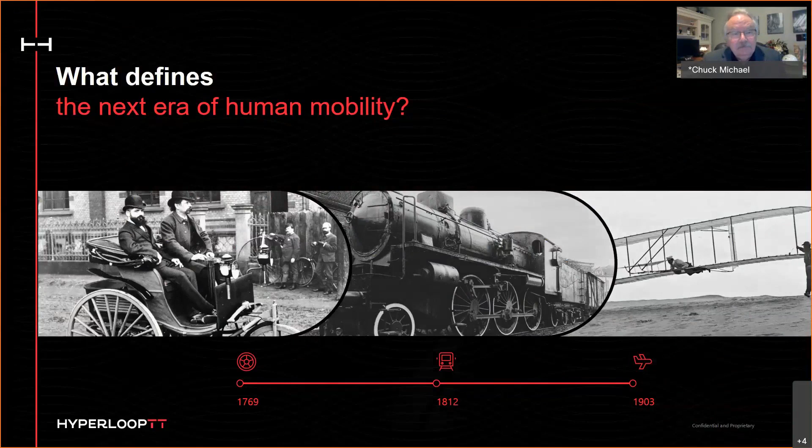This is the Hyperloop. This is an extremely high speed, very efficient, extraordinarily safe, sustainable, frictionless, and profitable transportation system. We have designed what we believe to be the safest, most efficient mode of transportation ever devised.

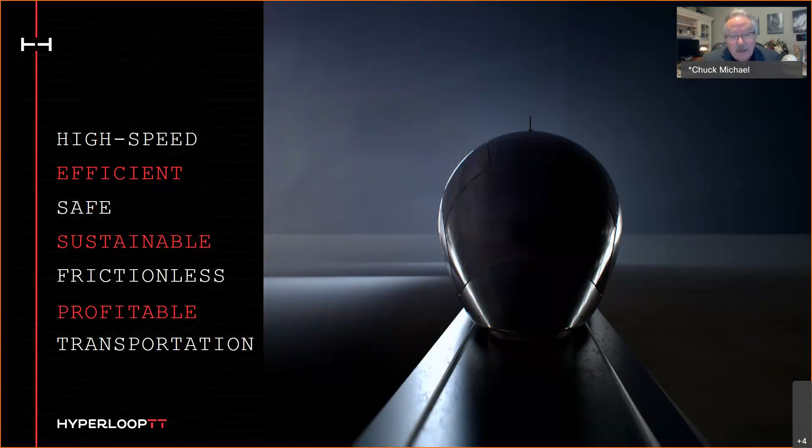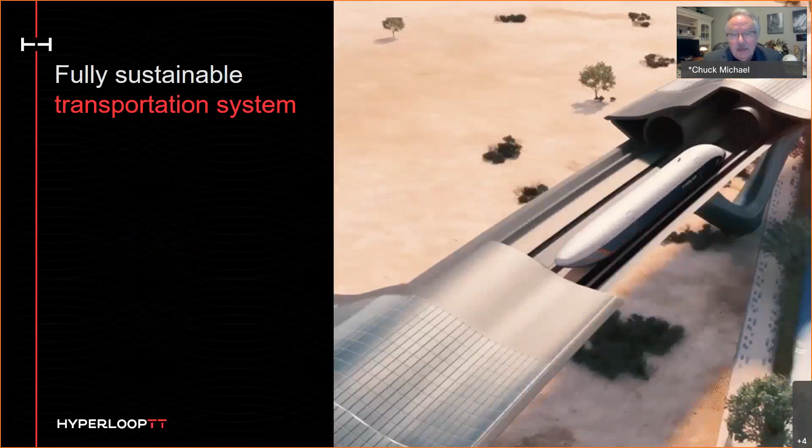This is a view of how it might work. This is an animation that shows an elevated section. As we'll talk about today, we can build these as an elevated section, at grade, or underground, depending on the specific needs.

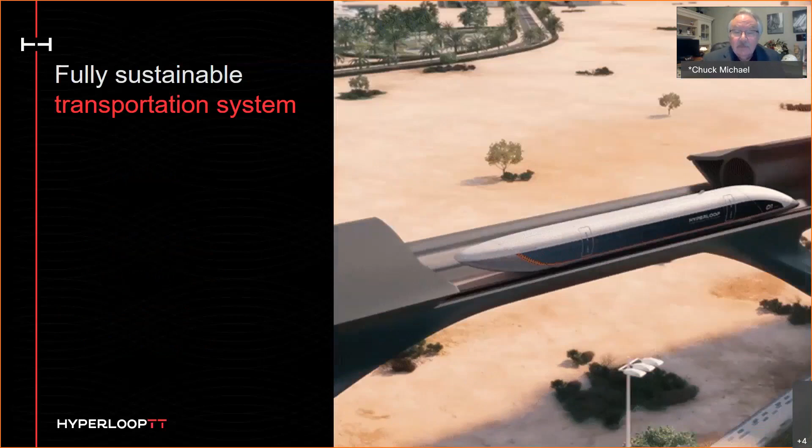This is a real capsule. This exists over in our R&D center in Toulouse, France. This was built in 2019, and it begins the definition of a new era of sustainable transportation, energy efficiency. We are carbon-free operations. We are incredibly safe by design from the ground up, extremely high-speed travel, fully connected. Every capsule and every system is fully connected with a control system, autonomous operation with no pilots, no onboard staff, and a frictionless ecosystem. As well, from an economic perspective, it is subsidy-free without any additional input of funds from local governments.

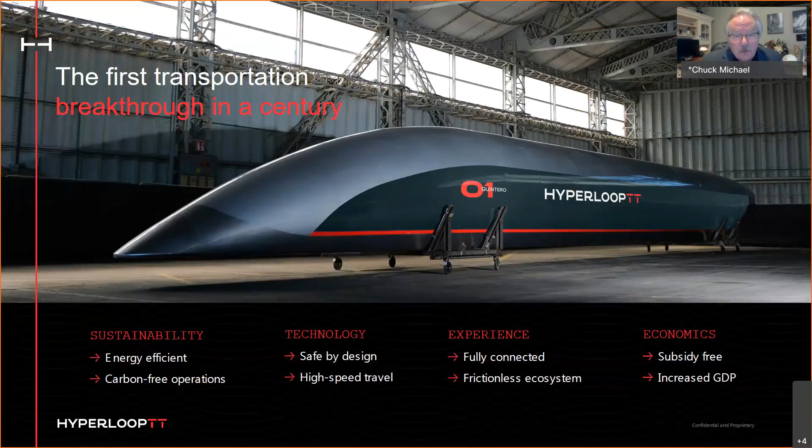This is the heart of the system, and you'll notice that we begin with a tube. The tube is around 4 meters in diameter, around 13 feet. For an elevated section, this would be a structural steel tube that would span between the pylons, probably around 100 feet. The tube has a series of pumps that reduces the air inside the tube, down to almost a vacuum, but not exactly a vacuum. We'll be at about 100 Pascal in terms of pressure. The room you're sitting in, no matter where you're at, is probably around 101,000 Pascal, which means we've taken out over 99% of the air. By taking the air out, we have removed all of the air resistance inside of the tube.

Next, we insert a capsule into the tube, and the capsule is a pressure vessel. It is designed very similar to an aircraft fuselage. It has a magnetic levitation system that is, and we'll describe this a little bit more later, but it's a passive magnetic levitation system that will elevate this to a few, say 15 millimeters off of the guideway. The guideway is an aluminum track, and it is propelled after that with a linear motor.

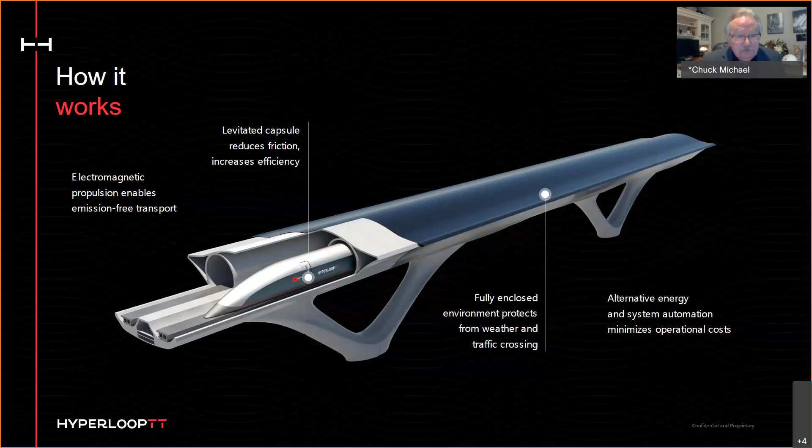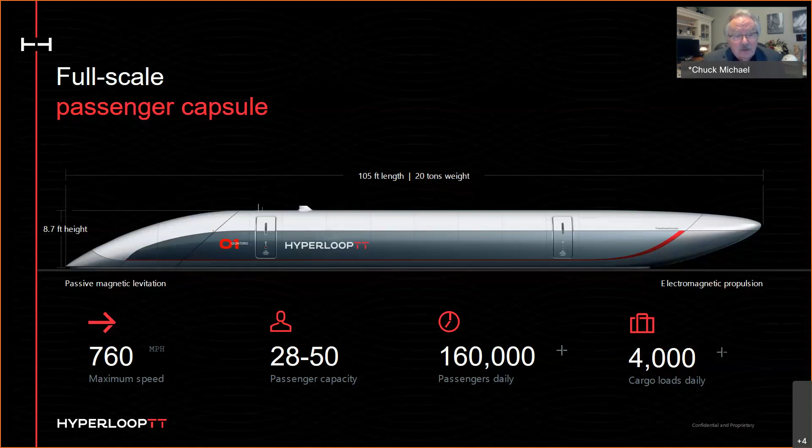Top speed of this capsule is around 760 miles an hour, just under the speed of sound. Each capsule will carry around 28 to 50 passengers, depending on the configuration. We can also configure this for light freight with, say, freight containers rather than passenger seats. In a passenger configuration, we can carry around 160,000 passengers per day.

This passive magnetic levitation system creates a magnetic field once you move it along a reactive surface. In our case, we use an aluminum track, and as that moves, it creates the magnetic field which gives us levitation, with no energy input at all.

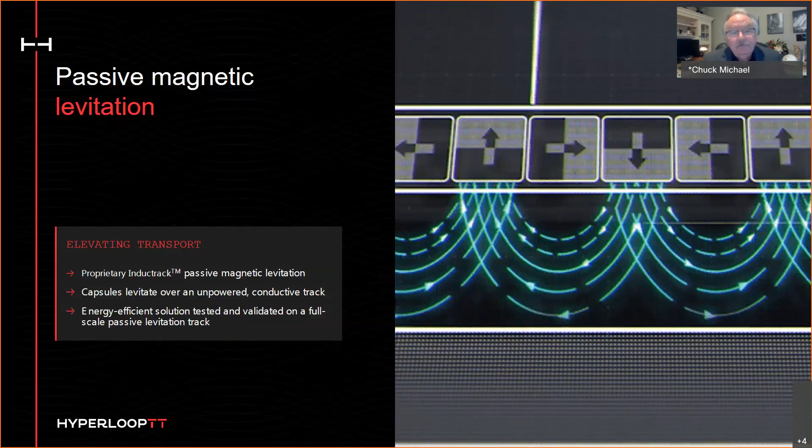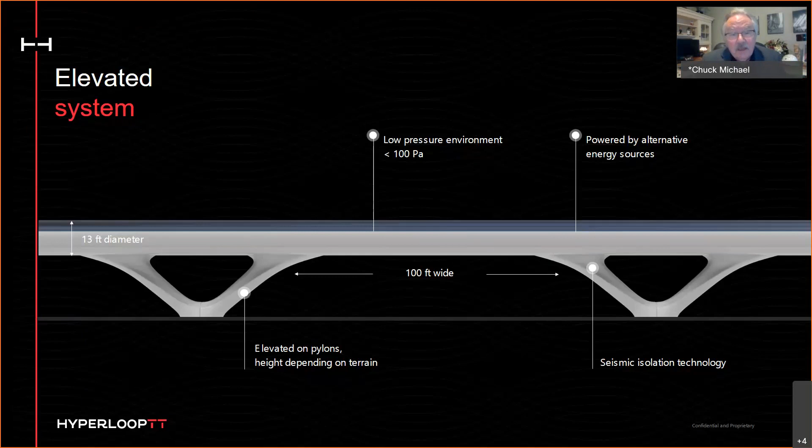The solar panels are sized to be able to generate more energy than we need on an annual basis, so we are energy independent.

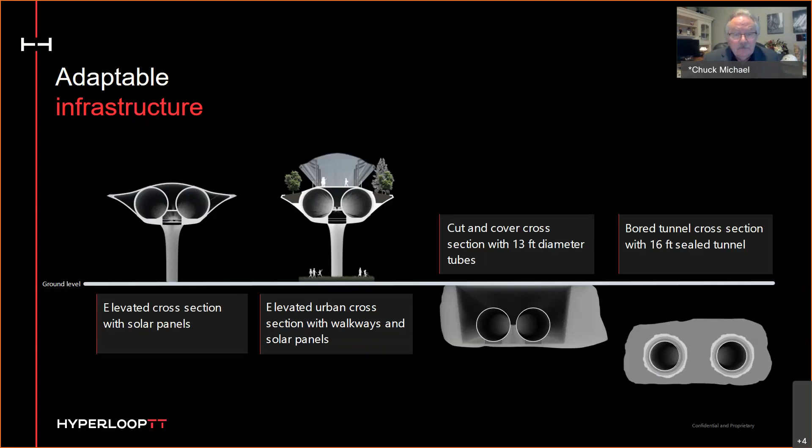We limit the acceleration in the Hyperloop to about 0.1 g, or one-tenth of gravity. This allows for a very comfortable initiation, acceleration, and deceleration, since passengers may range from a small baby to an elderly person. It's a very comfortable rate of acceleration, so that you wouldn't even have to have a seatbelt on at this rate.

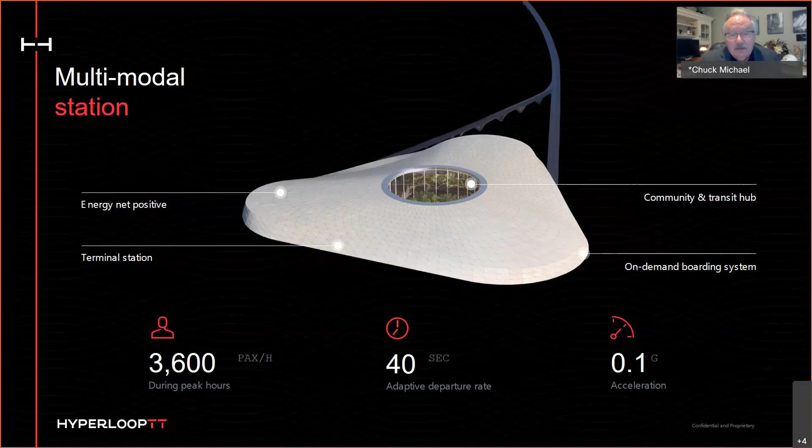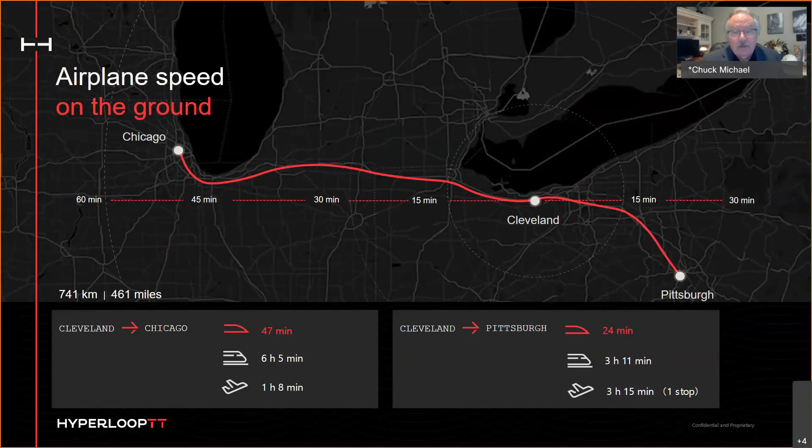It's an open book public document.

As I indicated, the Hyperloop system is able to operate on renewable energy, and that's the way it's designed. We have access to solar energy. If we have an underground system, we would either build a solar farm along the route, or we would cooperate with, say, a nonprofit or another entity that would build a solar farm, and we would purchase the energy from them.

In all cases, we would use renewable energy. It could be solar, or regenerative braking, which we build into the system - anytime we slow down, we generate a lot of energy and convert that kinetic energy into electrical energy. We also have access to geothermal in some parts of the country, and wind energy in other parts.

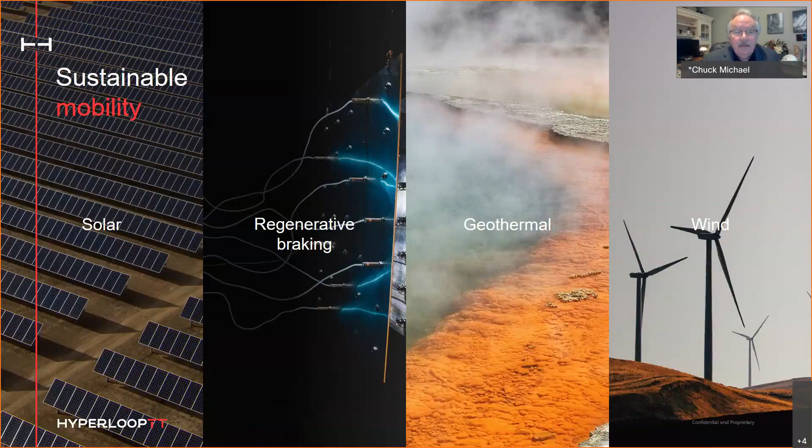With regard to the environmental effect of a Hyperloop, we've designed this with net zero carbon operations. As you look at the life cycle of development of a Hyperloop, from design, construction, and operations, it's the most efficient use of energy of any transportation system.

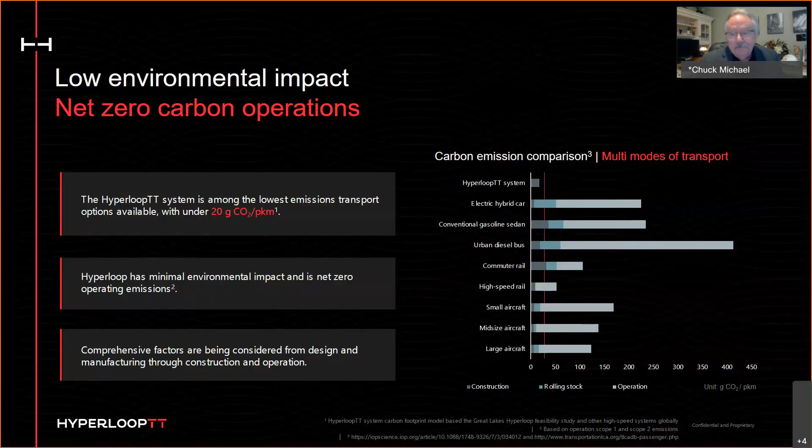The new technologies that have become necessary to develop the Hyperloop—we've used many existing technologies, even the passive magnetic levitation system. But along the way we've encountered situations where we needed to invent a new solution to an issue. The enclosed environment of the Hyperloop means we are immune from weather conditions, such as snow, ice, and rain. We are separated from any other form of transportation. There are no at-grade crossings, as you see with many other types of transportation.

The shell, the skin of the Hyperloop, required new development in technology with the carbon fiber system. We have embedded sensors throughout the carbon fiber using multiple layers. This is called vibranium—we loaned it to Black Panther, but in our case it originated with Hyperloop. It's a sensorized carbon fiber composite. The sensors allow us to continuously monitor the structural health of the system, the speed, the location, and all the things we need to know in terms of monitoring the successful operations of a Hyperloop system.

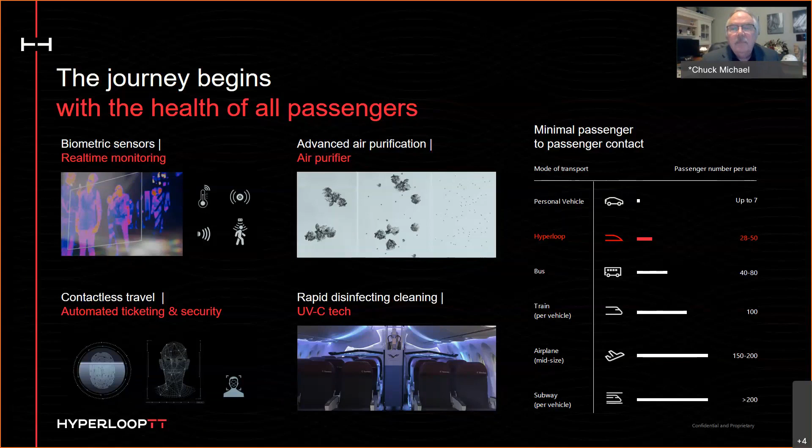We have about 28 to 50 passengers on each capsule, so the routing is rather continuous. When you go to a station, you don't necessarily need a reservation at all—you just walk up, take the next capsule, and in a few minutes you're on your way.

Once you're inside, considering that we're moving at greater than 600 miles per hour, we don't have any windows, but we've created windows inside in association with other companies such as Reflect and some video game folks. We've created an augmented reality window sitting next to your seat that is programmable—you can choose whatever image or motion you'd like, if you want to see cows or the Swiss Alps.

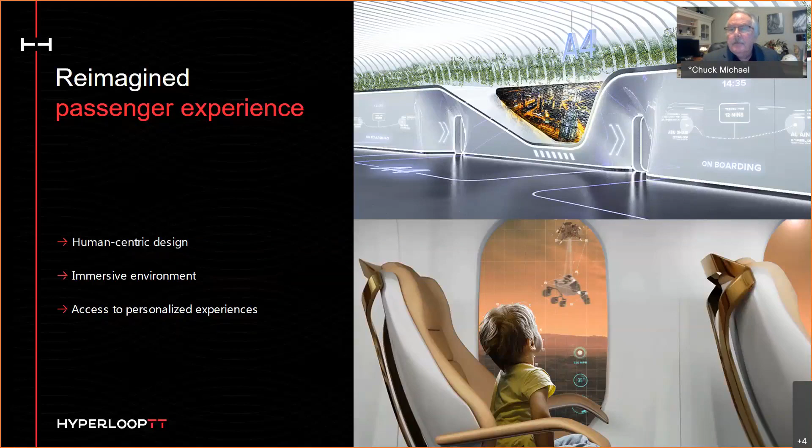When we designed the Hyperloop, it's a challenge to fund and maintain economically a high-speed transportation system. So what we have designed, in the end, is a low construction cost, low operational cost, and low maintenance cost system that is able to support itself from revenues in either passenger or freight categories.

For the ticket pricing, we have dynamic ticket pricing, which allows for discounts for senior citizens, students, or frequent travelers. We have on-demand mobility—you just walk up to the station and take the next capsule going out to where you're heading. It has a very high throughput, around 160,000 passengers per day capacity.

In an economic sense, considering that we work with the federal government on regulations and authority to construct, we evaluate the economics from their perspective, and it takes the form of a benefit cost ratio, so that if the benefits exceed the cost, you have a positive ratio, which makes you eligible for additional federal funding if that's required.

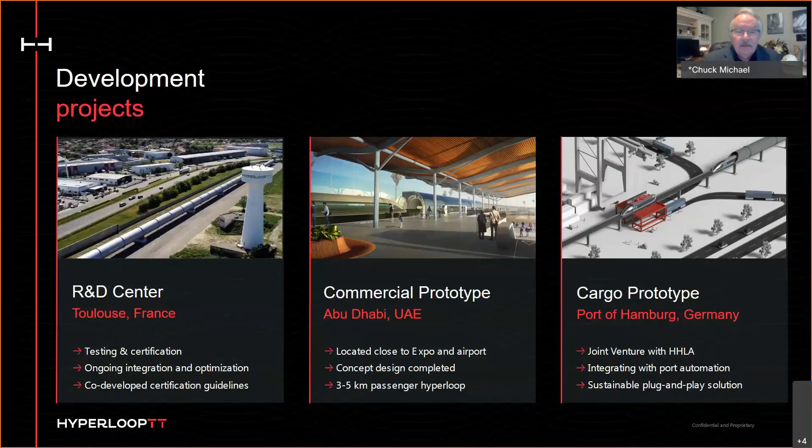In terms of timeline, the upper left is a 320-meter full-scale system in Toulouse, France, that is complete. We are in the process of integrating all the systems right now. We have completed all the pressure testing, as an example, and we're looking forward to passenger tests in the early to mid 2021, which would be the first passenger-ready system anywhere.

In Abu Dhabi, we have the 3 to 5 kilometer commercial prototype. Once that is complete, it would continue south into Abu Dhabi City. And we also have a commercial line in terms of the development of capsules and systems for passenger safety and comfort. Next slide.

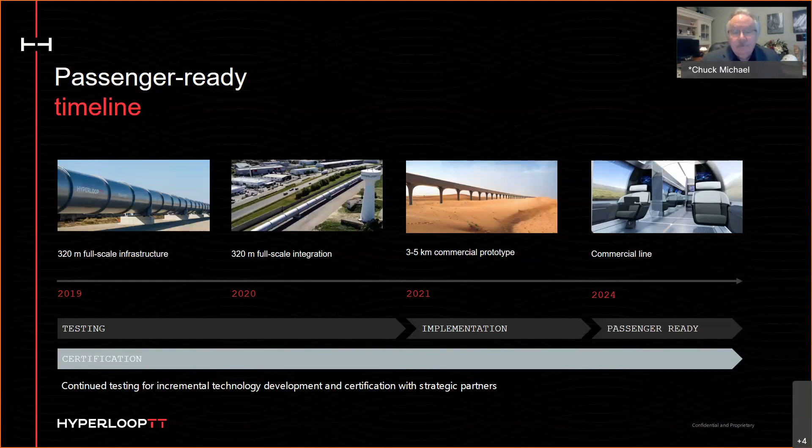In a regulatory sense, and in a commercial sense, it is necessary that these technologies be able to be insured. And we began working with the largest reinsurance company in the world, Munich Re. They have evaluated our design and construction approaches and have determined that we are indeed an insurable transportation technology.

We worked with a European certification laboratory, TÜV, to develop generic guidelines for Hyperloop. These will be generic guidelines for the design, construction, and operation of Hyperloop, which up until this time didn't exist. We shared those guidelines with the European Commission, and last year we shared them with the US Department of Transportation. Under government guidance, the Department of Transportation eventually organized a council called the NET Council, NETT, standing for Non-Traditional and Emerging Transportation Technologies.

This brings together all of the operating administrations within USDOT, such as the Federal Railroad Administration, Federal Aviation, Federal Highway, Federal Transit, the pipeline folks, and the vehicle safety folks. We can sit in one room with this NET Council and their representatives, and we can discuss the Hyperloop certification for the U.S.

First question, how many people can travel in a Hyperloop train at one time? The capsule has a capacity of between 28 to 50 passengers, depending on the configuration that we have in each one.

How long is it going to take to construct a section of Hyperloop track? We wouldn't build just a section. We would build a commercial project that would go from origin to destination. In the case of the Great Lakes Hyperloop project, if we begin in Pittsburgh and go through Cleveland into Toledo and Chicago, it would take about 6 years total to build that entire stretch. The reason we build a commercial segment is that when you develop your business plan and ask for funding, they're going to want to know how they get their money back. And the only way to get the money back is to have passengers and revenue from passengers and revenue from freight. So it would be a single commercial project taking about 6 years total.

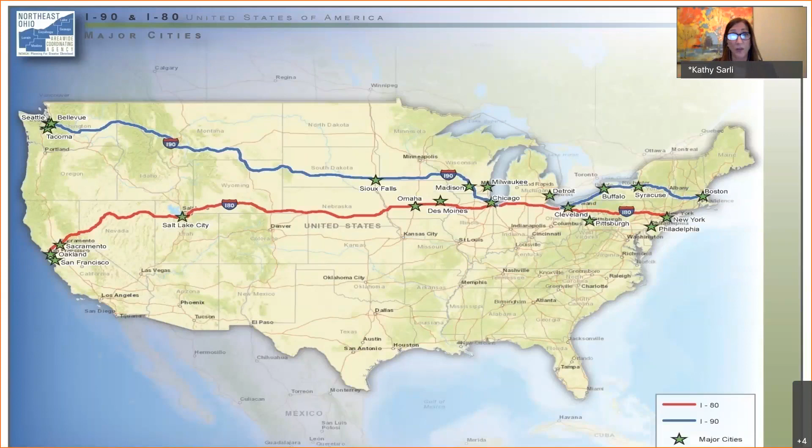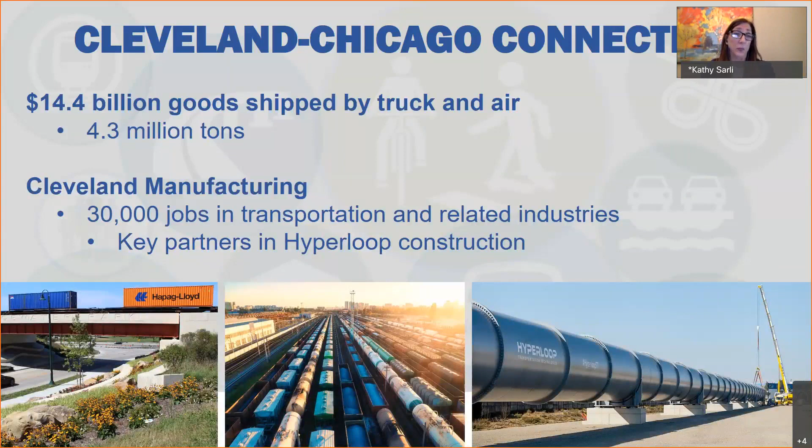Next slide. There's also a connection between Cleveland and Chicago by all the goods shipped between the 2 cities by truck and air, which is about $14 billion worth of goods, 4.3 million tons. Also in Cleveland, there's a lot of manufacturing jobs in transportation related industries, which would be key partners in the Hyperloop construction.

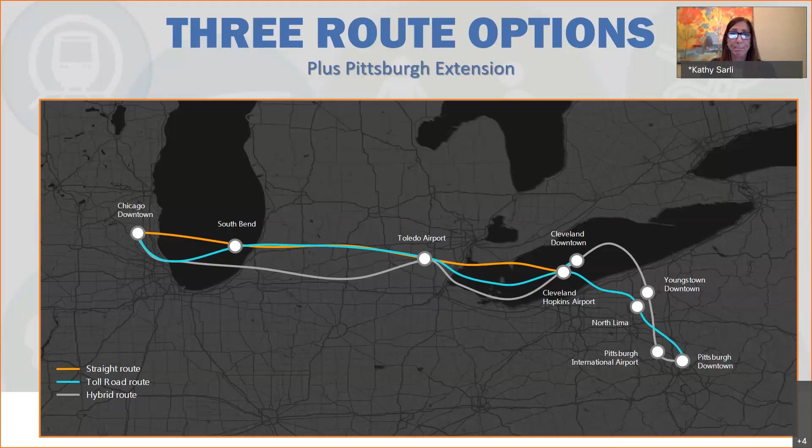Well, I'll just start talking about it. So I did include a couple of route timetables in here. I'll just highlight the Toledo one for you.

Depending on which route you take, between Toledo and Chicago is between 24 and 31 minutes. Toledo and Cleveland is between 17 and 19 minutes, and Toledo and Pittsburgh is between 34 and 35 minutes.

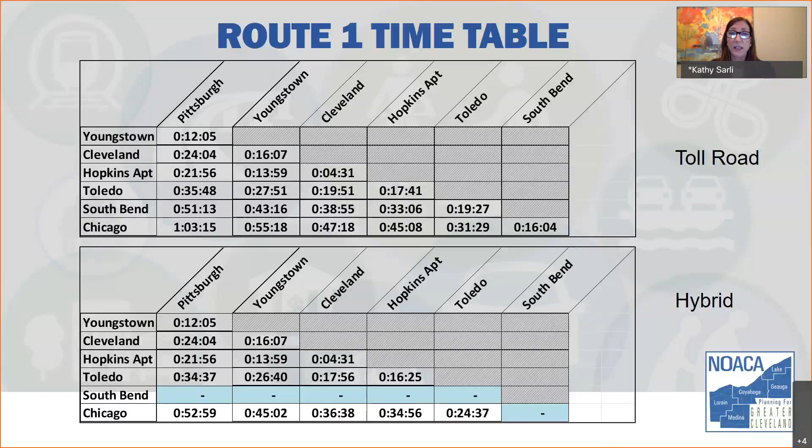The next one is just looking at the two different routes between Cleveland and Pittsburgh. Cleveland and Toledo to Chicago or Cleveland are the same, but to go to Pittsburgh you save a couple minutes. Otherwise it's the same.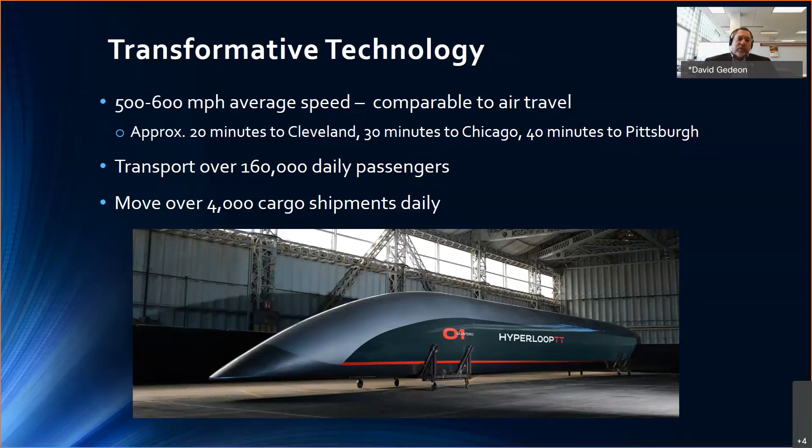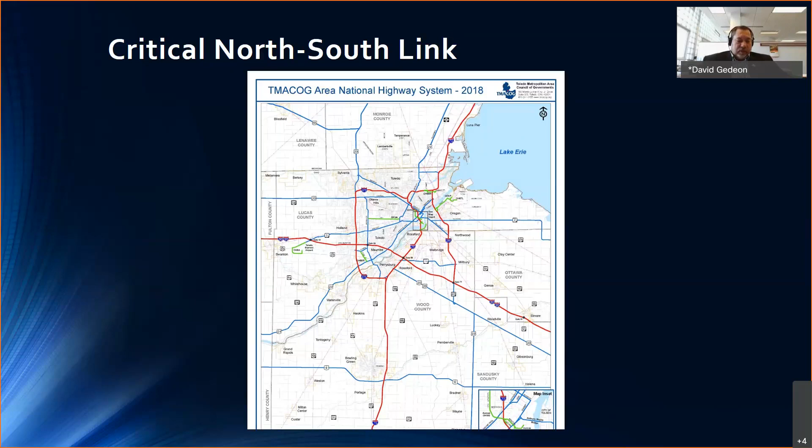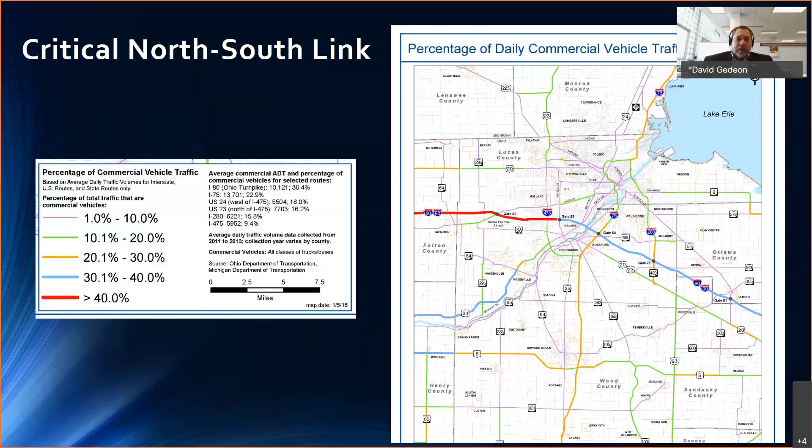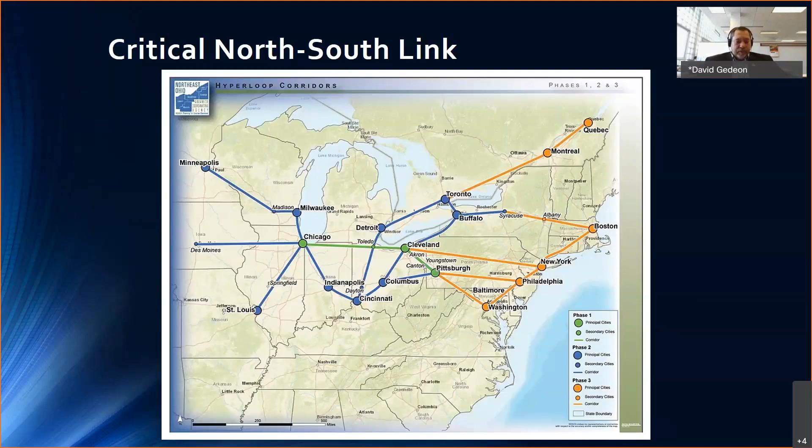Of course, the construction currently going on with the Amazon Distribution Center and the Amazon Delivery Hub in Rossford and Toledo, respectively, exemplifies how Toledo has grown in prominence, and Northwest Ohio has grown in prominence as a freight distribution hub.

Hyperloop is a technology that, if you're looking to move high value, time sensitive products and goods, is going to be a critical piece that shippers can take advantage of to expand their business opportunities. Next slide, please.

I'm going to take a moment to talk a little bit about another opportunity that our Northwest Ohio businesses can take advantage of too, coming up soon, and that's the Gordie Howe International Bridge. Currently, the Ambassador Bridge and the Windsor Tunnel transport the volume of trucks and passenger travel between Detroit and Windsor, Canada.

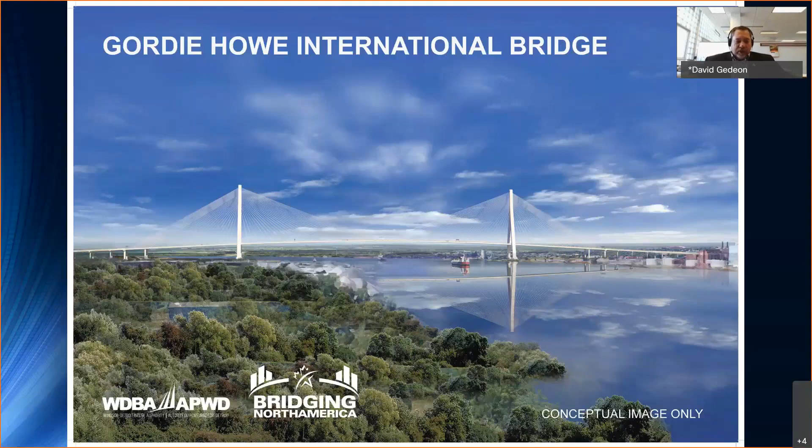Based on its current schedule, the Gordie Howe International Bridge is expected to be completed in 2024. In total, the bridge itself, the United States and Canadian ports of entry, and the Michigan interchange to I-75 is a $5.7 billion investment. 25% of the trade between the United States and Canada flows between Detroit and Windsor.

The primary crossing is currently the Ambassador Bridge, as I mentioned. That structure currently carries about 2.5 million commercial vehicles per year and 4.6 million passenger cars per year. Truck transport roughly equals $120 billion in goods annually. The Detroit-Windsor Tunnel carries a large amount of traffic, just under 4 million cars per year, but only about 20,000 trucks annually due to size restrictions.

Based on statistics from the Ohio Development Services Agency, Ohio was the 9th largest exporting state in the nation in 2019. Ohio exports to Canada total about $20.5 billion annually, and that represents 39% of the state figure.

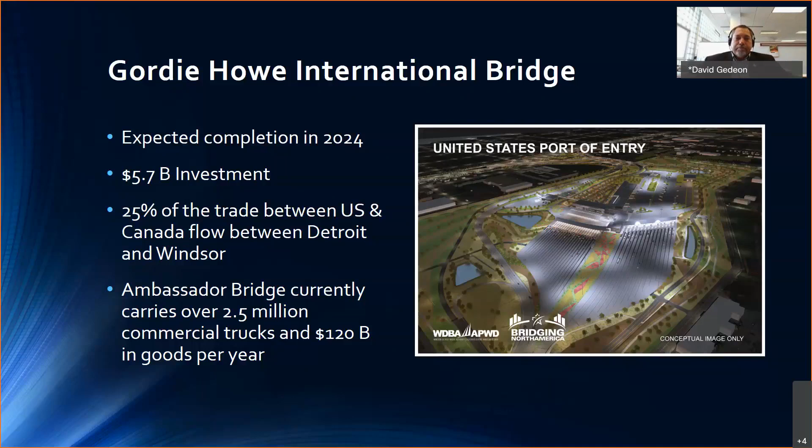The Gordie Howe Bridge is going to have 3 lanes of travel in each direction. The Canadian Port of Entry is going to have 24 inspection booths and 16 toll booths, which will handle the tolls for both U.S.-bound and Canada-bound traffic. The United States Port of Entry is going to have 36 inspection booths.

Last week, TMACOG held a tech session discussing economic development opportunities. The Gordie Howe Bridge was a prime discussion topic at that session. Developers, shippers, and distribution companies are already strategizing ways to take advantage of the increase in commerce that the new bridge is expected to induce.

Hyperloop can be a significant attraction factor for firms looking to locate in Northwest Ohio and Southeast Michigan. Hyperloop would be an ideal fit for high-value, time-sensitive goods delivery.

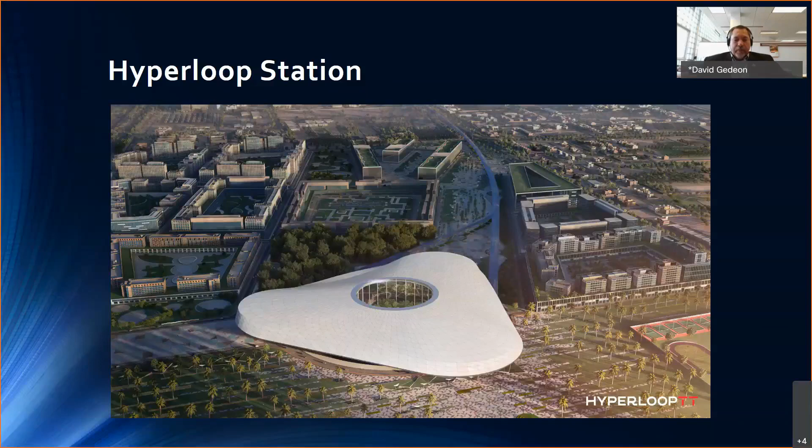Improved connections for freight movement. Considering the opportunities that Hyperloop will present for shippers and distribution companies, improved freight connections may be needed to improve movement in and out of the Hyperloop station. Connections to existing roads may not be adequate to handle the increased traffic volume, so planners and engineers will need to reevaluate roadways for both capacity and safety. That can include the last mile connectors to and from the facility.

Transit options will also need to be expanded to allow elderly and disabled individuals access to the station as well. For example, in the illustrations we've seen, a proposed Hyperloop facility in Toledo could be located at or near the Toledo Express Airport. Presently, public transit does not serve that portion of Western Lucas County, so transit services would need to be expanded to make that station accessible to all users outside of the existing transit-served area, if they're looking at a Western Lucas County site.

In terms of the impact of all this on our results, if we go to the next slide, we'll see that for the first time in my experience carrying out high-speed ground transportation studies in North America, since I came here in '86, we've done over 100 of them, we produced a positive financial return on investment. That's a revolution.

The 4 to 6% return on investment we found in these studies is a good return, not the fantastic return a Fortune 500 company would go after. But if you ask the hedge funds, the investment banks, and the teachers' pension fund, they're all going to want that kind of investment. I can get a mortgage on my house today between 2 and 3%, so a 6% return on investment is really good. That's a revolutionary result.

Basically what we're seeing is that there's a great opportunity for the private sector as well as the public sector to participate in the development of Hyperloop.

In terms of the cost-benefit analysis, we were very careful to follow US DOT FRA criteria carefully in making the assessment, and we came up with very significant cost-benefit ratios at both 3% and 7% discount rates. Now, 7% is really a way to discourage you from building infrastructure, because it says you can only borrow money at 7%. Well, we all know you can borrow money at 2 to 3% - even I can. So a major infrastructure project would certainly be able to borrow significant money at 3 or 4% quite easily. So we've got a really strong financial and economic result coming from the business case we developed with NOACA and HTT.